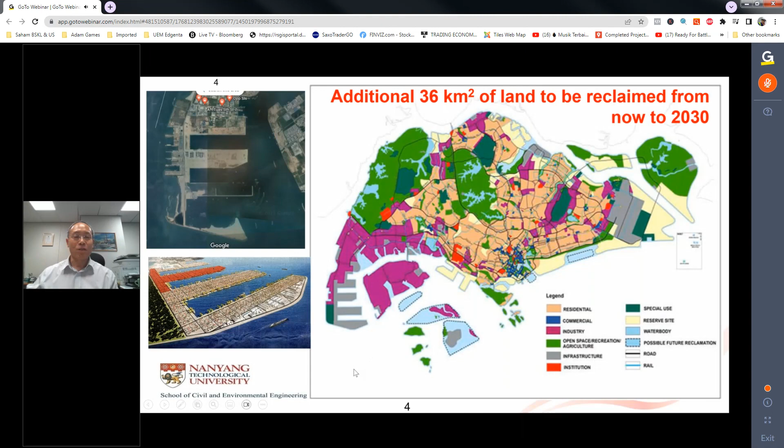By doing land reclamation first, well you also know we don't have sand or good fill materials for land reclamation. So sometimes we may have to use very soft marine clay and dredge it from the seabed as the fill materials for land reclamation.

Malaysia, Singapore, as well as many countries in Southeast Asia are also suffering from sea level rise. By prediction, maybe half, or I should say one-third, of Singapore will be inundated by 2100.

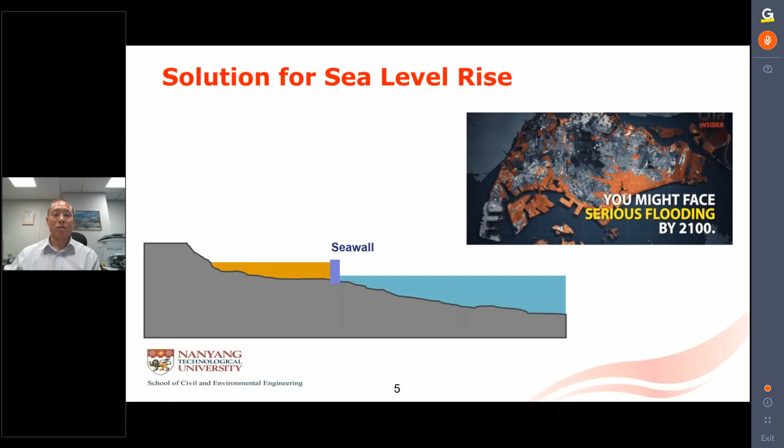This is what has been proposed for Jakarta. Some of you may have heard the proposal to construct a giant seawall as shown in the picture below. Here, it's not just having a wall, there's also some land reclamation involved. The wall can help form a coastal reservoir, as you can see in the graph, and the coastal reservoir will also provide clean water to Jakarta city.

This was a proposal quite some time ago, but it has not been implemented or gone into practice. If we are going to use the seawall to form a coastal reservoir, we will also have to dredge the 13 rivers within Jakarta, just to make sure the water collected will be clean enough.

So we will need to do dredging of the seabed. As a result of the dredging, the dredged material can be used for land reclamation, for the plan which we have just seen. In other words, for the Jakarta project, if Jakarta is going to go ahead with the project, then there will be some land reclamation to be carried out.

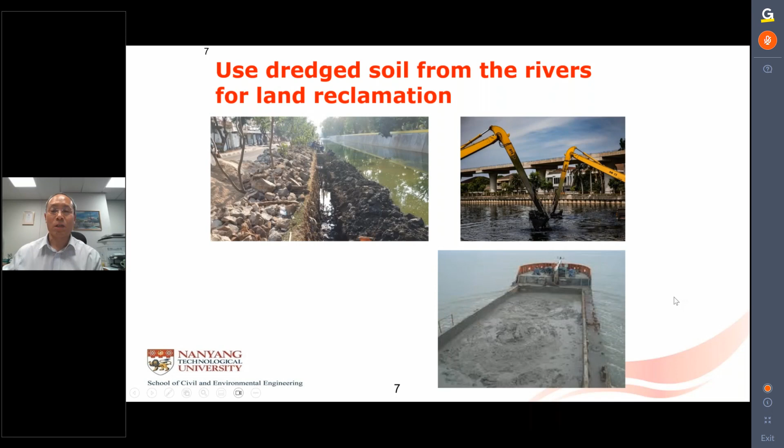So land reclamation using very soft fill materials would be one of the options for them to consider. But the first question some of you may ask is, is it feasible to use dredged slurry for land reclamation? And the answer is yes. There are a number of examples.

For example, the port of Brisbane, part of the land reclamation is by using river mud dredged for maintenance dredging from the seabed. So those dredged mud are used for land reclamation for the Brisbane port.

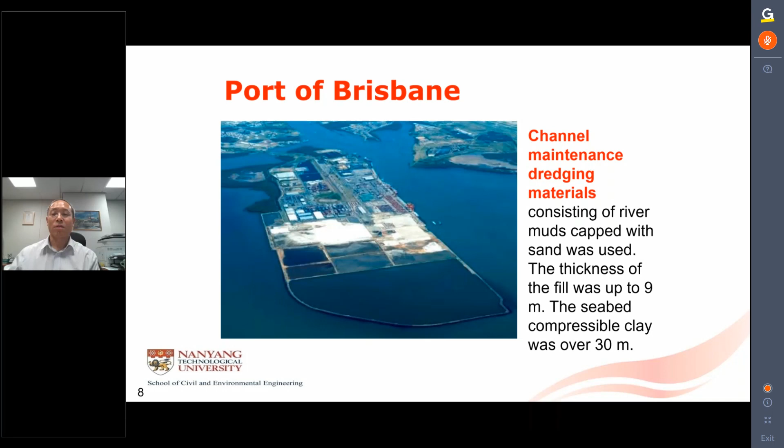Also in Tianjin or Wenzhou, which are two coastal cities along the east coast of China. Of course, Tianjin is further north, close to Beijing, and Wenzhou is somewhere near Zhejiang province. Both cities have been using marine clay dredged from the seabed in a slurry form for land reclamation.

The reason for that is because for both cities, within the vicinity of 100 kilometers, there isn't any sand fields for them to use for land reclamation. In fact, in Tianjin, they have already reclaimed more than 190 square kilometers of land purely using dredged slurry, and this is actually more than the land reclamation made altogether in the past years for Singapore.

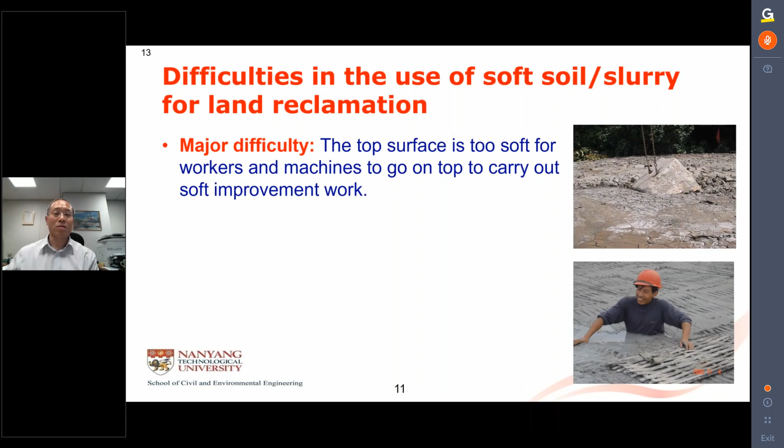The difficulty in the use of soft soil, particularly slurry, for land reclamation is that the top is too soft for workers or machines to go on top to carry out soil improvement work. Even if, for example, you want to install PVDs, you must have a working platform for the PVD installation rigs and for all your machineries to go on top. It is not possible even for a concrete block to stand on top, or for workers to stand on top of very soft, soupy mud.

So the key technical challenge is how to form a work platform. In my opinion, there are a number of methods, but the method to be used is the one with the lowest unit cost. And the reason is very simple: for land reclamation, we are talking about millions of cubic meters of fill, so if you can save one dollar per cubic meter, you are saving millions of dollars.

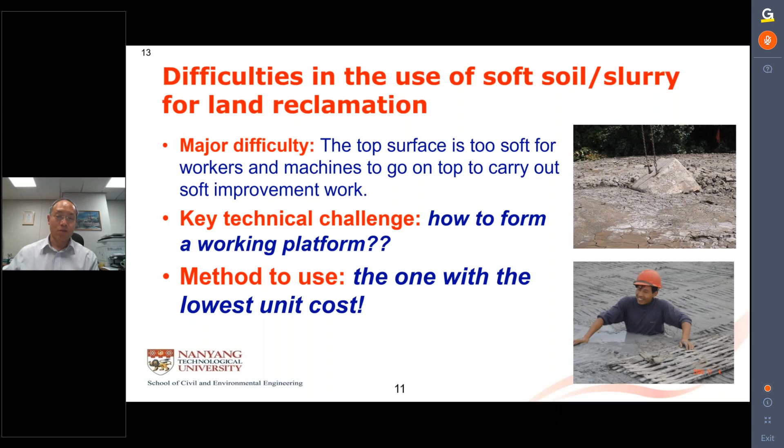Now let's discuss what are the methods available for the formation of a working platform on ultra soft ground.

But to put a layer of sand on top of very soft clay is also challenging. Before I talk about that, let me give you a quick review of other methods available. The second method is using cement.

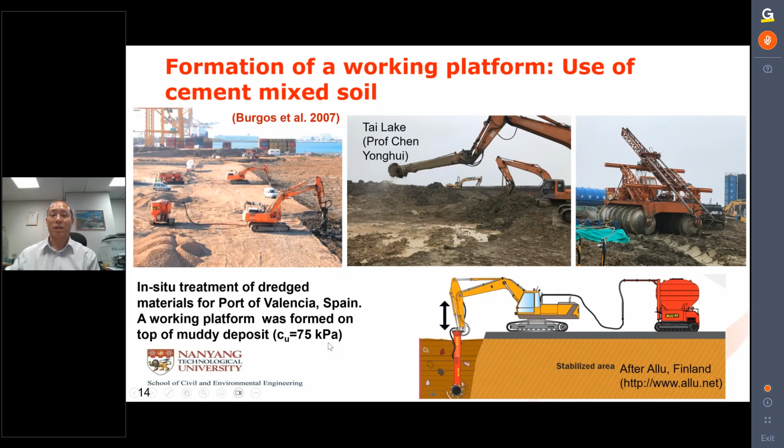Now let's go back to how to place a layer of sand on mud on very soft ground. Some of you know Professor Broms, who was my former boss. He taught at NTU for quite a number of years before his retirement. He proposed a method as early as 1987.

What he said is, if we have very soft ground — at that time he was thinking more for construction on top of some of the mine tailings in Malaysia, because you have some mining, so now you have some ponds formed as a result — if we are going to, for example, build a road on top of it, what Professor Broms proposed...

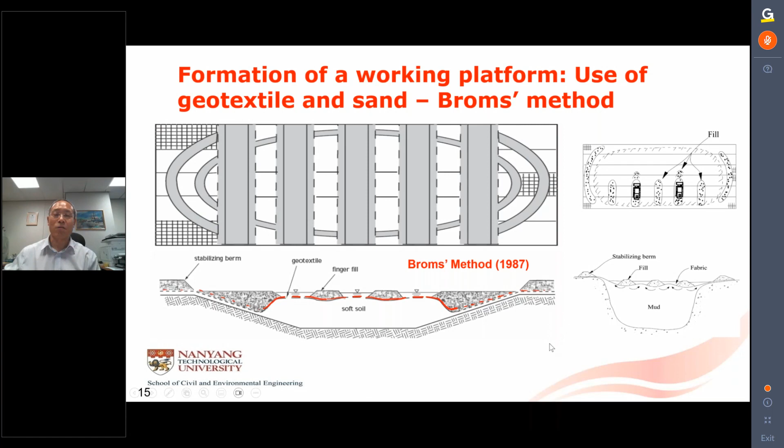Eventually you will be able to use the geofabric to sustain the finger fills. Then after that, you can spread the fingers out and form a layer of fill, a layer of sand fill, on top of the geofabric.

Professor Broms has also done analytical work to develop solutions for calculating the tensile stress in the fabric, as well as the amount of settlement involved for the berm to be stable. He also developed design charts for the bearing capacities of each fabric, calculated as a function of the width of the finger. The graph on the left is for 2 meters, and the graph on the right is for a width of 4 meters. His variables include the distance between the fingers, L2, which ranges from 4 meters to 10 meters in his chart.

He has also given solutions for fabric with different tensile strengths, for example whether it's 160 kilonewton per meter or 40 kilonewton per meter, and the amount of settlement as well as the bearing capacity involved are different. So this is within our expectation.

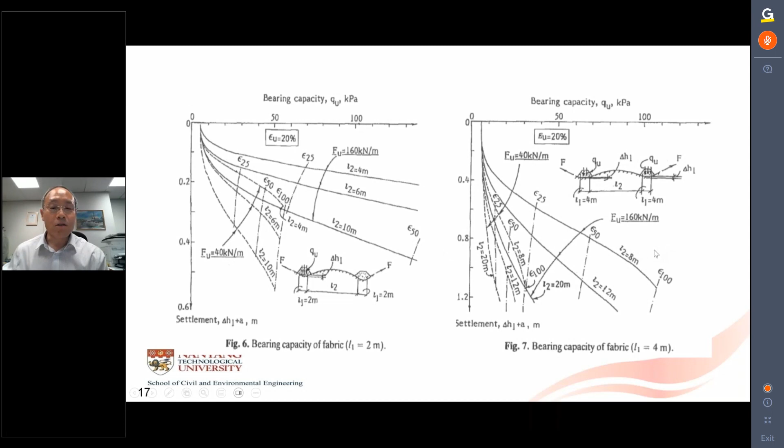We actually wanted to use Professor Broms' method for one of the projects in Singapore, which involved pumping marine clay into a pond. However, we encountered difficulties because even if you put a layer of fabric, the ground is still so soft that it is very difficult for a finger to be formed.

Even though the finger can be relatively narrow and the height of the finger can be small, sometimes it's just like a waterbed - the sand will not form a strip. Sometimes it lumps into a chunk and sinks down, defeating the purpose of having a finger.

So to overcome this difficulty, we thought it's probably easier to form a finger using a geotextile tube. If we put a geotextile tube, we can just pump the sand into the tube, and in this way the fingers or berms can be formed. So we did that, and it was better than just putting sand on top of the fabric to form a berm.

Because now it is cylindrical, or you can see it's an oval type of finger, rather than a berm as proposed by Professor Broms, the analytical solution may also need to be different.

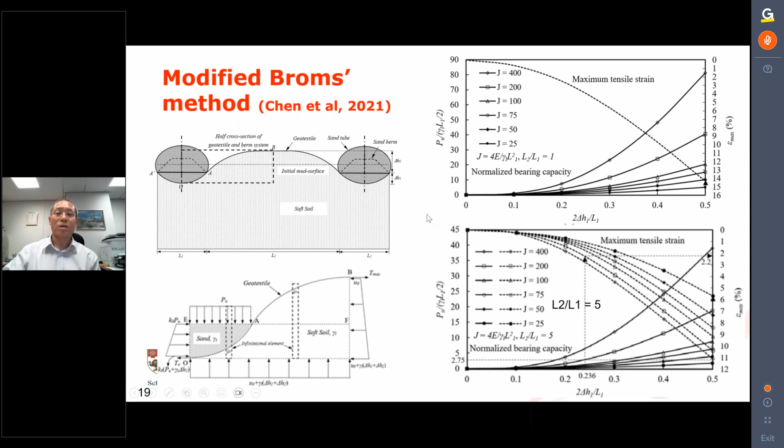So the so-called modified Broms method was attempted for one real project. The picture showing here shows some of the construction processes.

Firstly is the placement of a layer of geotextile fabric. As you can see from here, the geotextile was used. Because the geotextile was actually relatively heavy, it was not that easy to pull from one side of the pond to the other. Foam was also used to enable the geotextile fabric to float on top of the water. A crane is used to pull it from the other side.

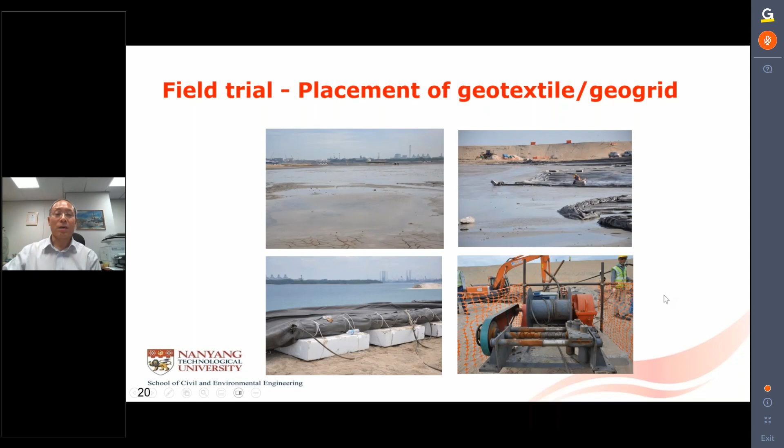Even so, it is not that straightforward, because sometimes the joints of the geotextile fabric can tear. If that's the case, you have to improve the seams to make sure the seams will not open. Then even after the geotextile was placed, and after the so-called geotube was used to form the berms and fingers, subsequently for this particular project we actually observed a burst.

A burst of the geotextile fabric - in other words, the mud is now shooting out from the opening. The mud actually covers quite a large area of the constructed site. Once you have this, it is considered a failure in terms of the construction process.

So in other words, even if we have used a geotube, sometimes if your mud is very soft, if it has a very high water content, it is difficult to apply this method.

Well, this is for one project. Then for another project in Singapore—excuse me, I cannot mention the project names because I've signed a lot of confidentiality agreements, but nevertheless I can show some pictures. So we thought, having learned our lessons, that one layer of geo fabric, geo textile, may not be strong enough.

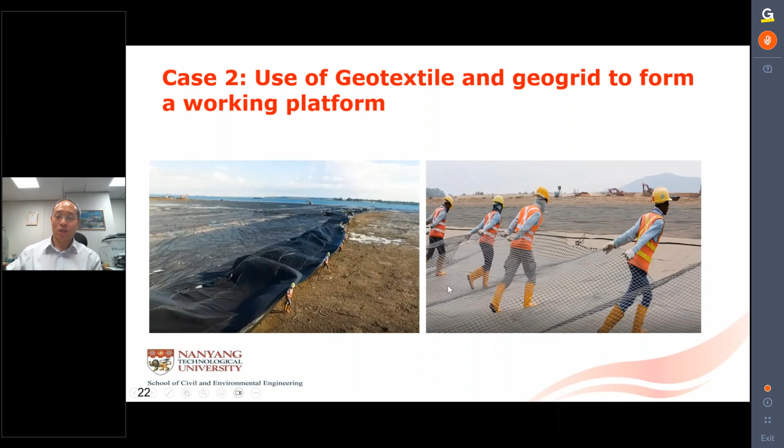So this time we put the geogrid below and geotextile on top. We thought that with this, the strength of the geogrid plus the geotextile would be strong enough against any bursting or rupture. But as a matter of fact, in this particular project, a bursting took place again.

So the mud actually shot out and covered quite a large area of the geogrid plus geotextile. But it didn't just cover it—some of the mud sank down, and this caused a lot of inconvenience and a lot of time for the remedy work for cleaning up.

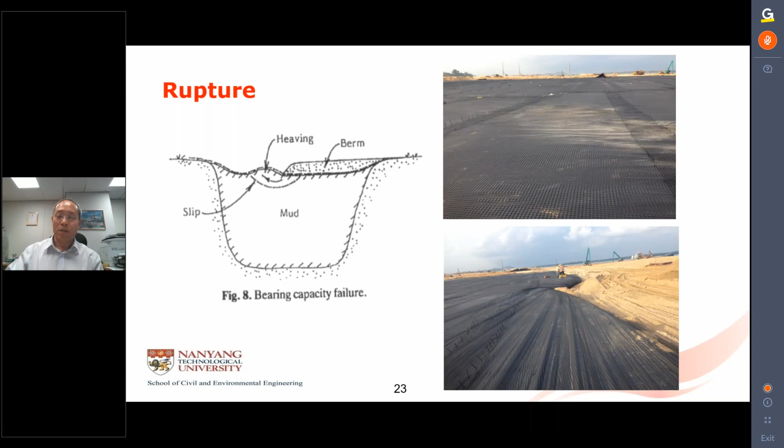Well, the next solution, of course, is by using bamboo. You may say, well, even if your geogrid is not rigid enough, the bamboo will offer not just elasticity but also rigidity, giving you a better chance for the sand layer to be placed on top.

Indeed, in China this bamboo mattress has been adopted. In fact, for one of the projects in Malaysia, as shared by Mr. Toh, I took this from his paper and his co-workers' paper published in 1994 in Geotextiles and Geomembranes. Those are figures taken from his paper, and he was using Polyfelt TS700 at that time.

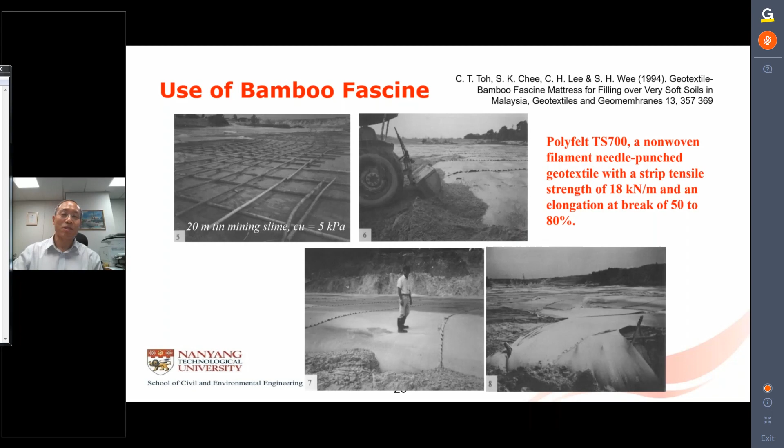Even with this bamboo fascine, as reported in this paper, bursting took place again. So in other words, even with bamboo fascine, there's no guarantee that bursting will not take place.

Well, to conclude, you can use the Broms method, a modified Broms method, or a bamboo mattress for the formation of a working platform by putting a layer of sand, a layer of good earth, on top of slurry, with the help of either geotextile or geogrid plus geotextile. However, there is no guarantee that bursting failure will not take place.

So basically, it may not take place, so you need to run the risk. But is there another way to enhance our reliability slightly better? For that reason, we proposed one method, the so-called short PVD method.

So basically, what we say is, since we need to form a working platform, can we use PVDs which are installed only a few meters into the mud? We improve the top layer first.

The whole purpose of improving the top few meters of mud is for the soil to gain a bit of undrained shear strength. If you do finite element analysis, you will see it makes a big difference whether your undrained shear strength is 1 or 2, versus 5 to 10. If it's 5 to 10, your stability is much enhanced compared to soil without any undrained shear strength, or with only 1 or 2 kPa.

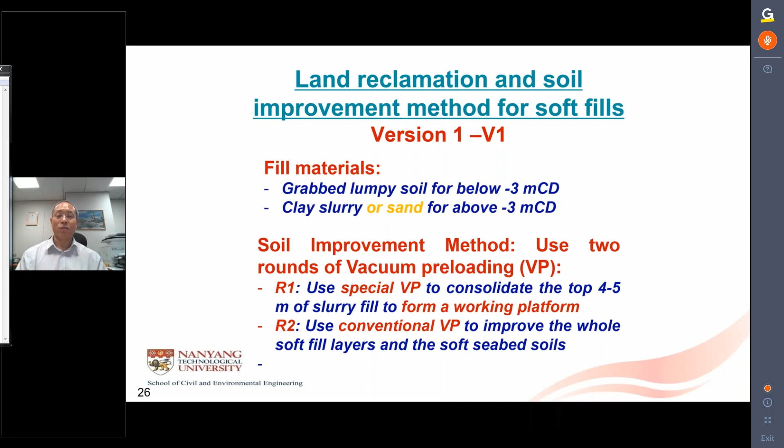So once you have a working platform, you can do normal soil improvement work. You can let your vertical drain installation rig and lightweight trucks go on top to do further soil improvement. The construction procedure following this proposed method can be illustrated in the following cartoon.

So if we can still use lumpy soil, and if it's not a super large scale project, we can still grab soil and use a barge to transport the lumpy soil into the land reclamation site. Then we dump it using a bottom-open barge. However, this can only be done to a certain water depth, let's say to maybe -3 MCD, if 0 MCD is the mean sea level. After this, it will be difficult for you to dump lumpy soil anymore.

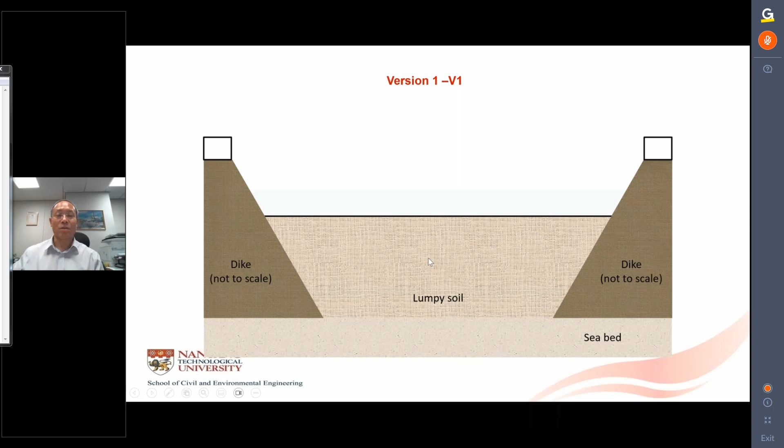So you have two choices. One, you can top it up using sand, or if you don't have sand, you can still top it up using dredged clay. But this time you have to use hydraulic fill—you have to use pumped slurry.

Because pumped slurry has a lot of compressibility and settlement, you may need to extend your dike temporarily to add more fill materials. After consolidation, you go back to the required elevation. But if you do this, it becomes difficult to go on top and do any soil improvement.

Yet you can still use a special machine, which I'll show you after this slide, to install just a few meters of PVD manually. Afterwards, you can use a very light machine for the installation of a few meters of PVD into the mud.

Then you can go on top and put a layer of membrane. Once you have the membrane, you use a vacuum pump to start consolidating these 4 to 5 meters of mud, reducing the water content to gain a bit of undrained shear strength. After that, you put a layer of sand fill.

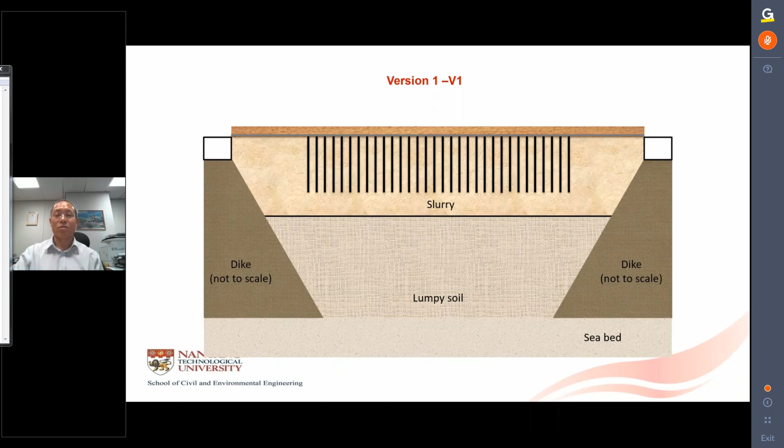In fact, 1 meter of sand fill is sufficient on top, not just to give trafficability but also to enhance bearing capacity. Then your vertical drain installation rig can go on top to install PVDs all the way through the clay fill materials and down to the bottom of the soft seabed. After that, you continue to use vacuum to do further soil improvement. The vacuum has a limitation of 80 kPa as its maximum surcharge.

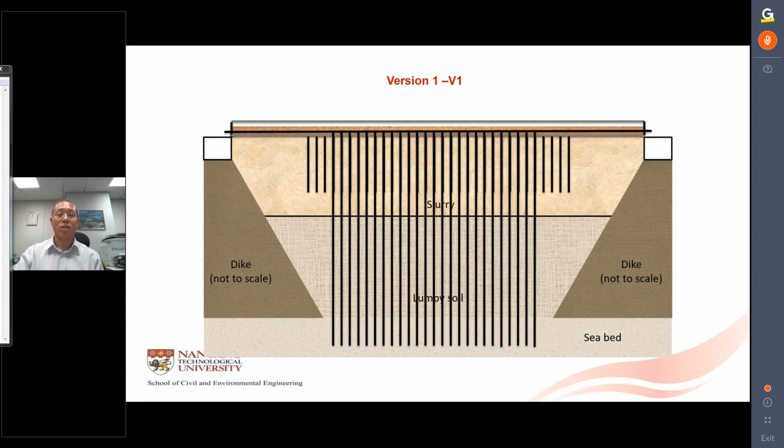However, if you need a higher surcharge, what you do is, after vacuum consolidation, or maybe in the middle of it, once your clay has gained enough undrained shear strength, you go on top and add a fill surcharge to top up your surcharge if you need more than 80 kPa.

Once the PVD has been installed, you don't need to put a sand blanket. For those familiar with vacuum preloading, the first step is installing your PVD. The second step is installing the horizontal drainage pipe, which normally needs to be embedded in a layer of sand, called the sand blanket. But there are ways to do away with the sand blanket, by connecting your PVDs directly to the horizontal drainage pipe.

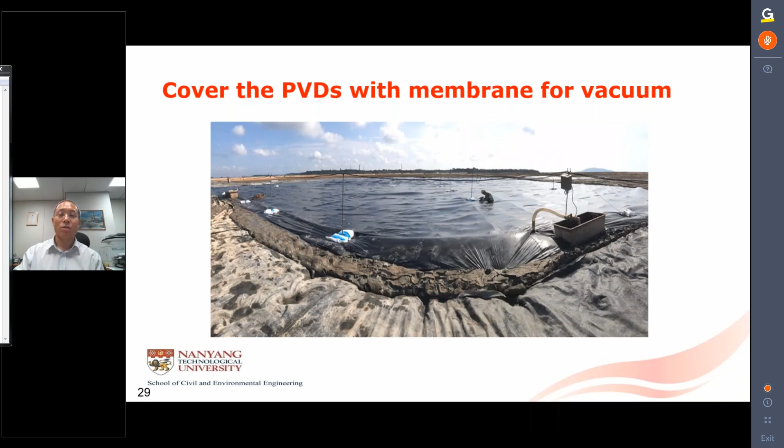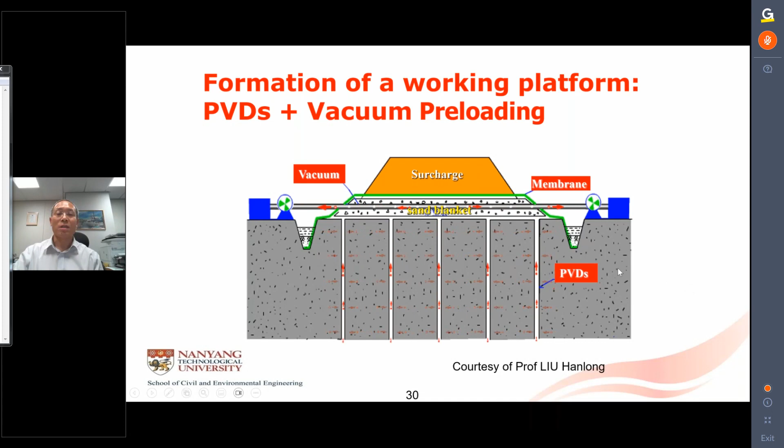I'll show you the pictures after this. Once your PVDs are connected to the vacuum pump, you can switch it on and start vacuum consolidation, as shown in this cartoon.

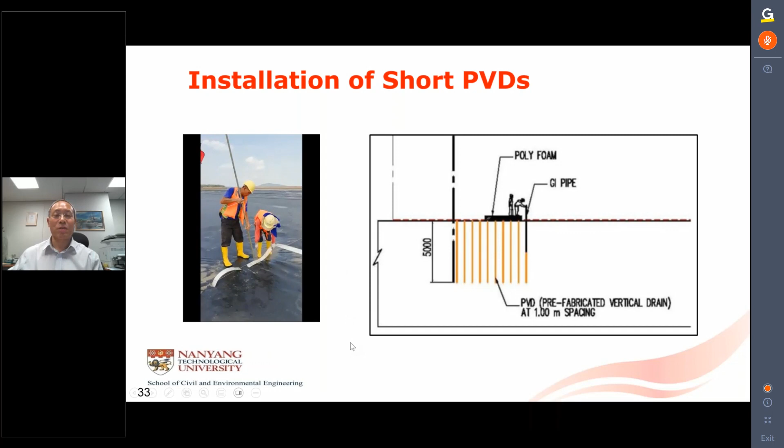Yeah, so this is how the PVD is installed by manual labor. Of course, you can say, wow, this is very labor intensive. Don't worry, I have another example to show you on how the PVDs can be installed using a very light machine. Once the PVD is installed, it will be connected to the vacuum distributing pipe, as shown in this picture, by a special coupling.

So this coupling is actually easy to connect. For the second case study, I'm going to show you some more pictures on how this is done. Once your PVD is connected to the drainage pipe or vacuum distributing pipe, as shown in this picture, you can put a layer of membrane.

Sometimes you may need a layer of membrane and another layer of protection, or even more than two layers. But once you have put the membranes, you can start to use your pump to do vacuum preloading. For this particular project, at one monitoring point, a settlement of up to 800 millimeters was incurred within 55 days.

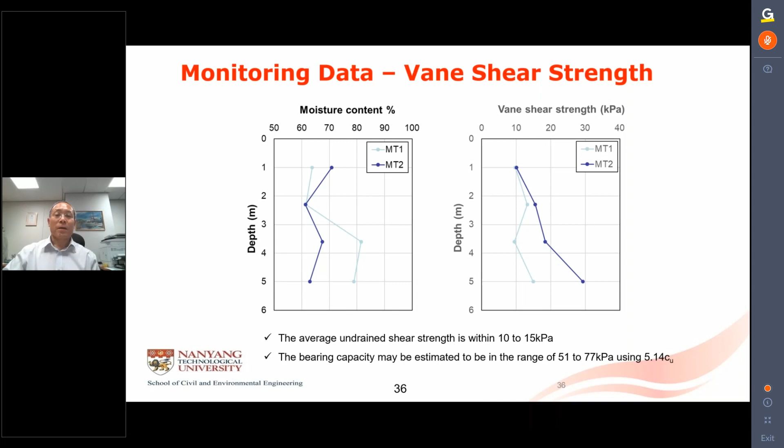That was one case in Singapore, and recently I was involved in another land reclamation work in Indonesia, where the same method was adopted.

The ground is still relatively soft. In this case, a layer of bamboo mattress was placed before a layer of geofabric was put on top, so the workers can work on top of the bamboo frame.

To do installation of PVD, as well as connecting your PVD to the horizontal pipes, you can do some light construction work. But at the time we visited the site, we still had to use timbers for people to work on top, because even with a bamboo mattress, the ground is still very soft.

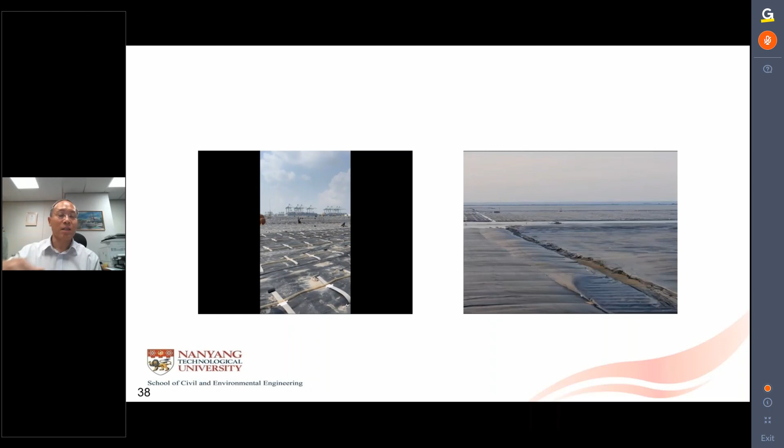The PVDs were installed using the lightweight PVD installation rig, as you can see from the earlier picture shown over here. So this is how the PVDs are connected. And here is the picture

showing when the membrane has been placed, when the vacuum has already been applied for some of the sections. You can see from the picture, this is a big project, not a small area for land reclamation.

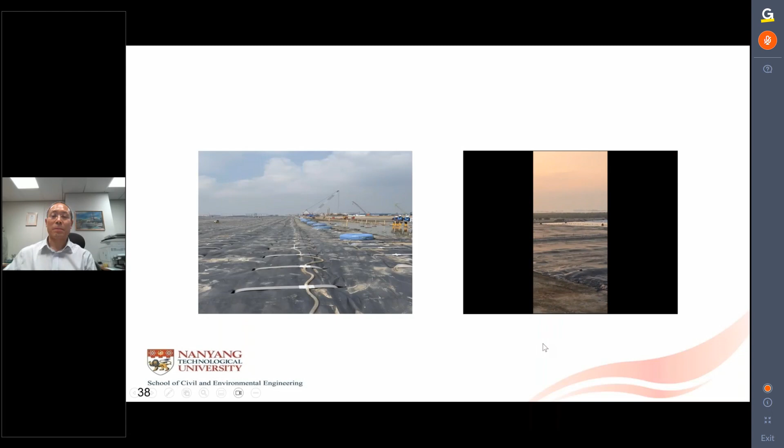So in other words, I'm using the short PVD followed by normal soil improvement. At least this method is feasible. It has been used for 2 projects, one in Singapore, another one in Indonesia.

But even so, in my opinion, this method has its own shortcomings, because there are still a number of difficulties involved, for the simple reason that PVD is used. So what are the difficulties? Number one, we still need a working platform, which is difficult and time-consuming to build. Although we can use short PVD, the consolidation on the short PVD will still take at least 2 to 3 months.

So this is time-consuming, and also it is not that straightforward for you to install the short PVDs and for you to do vacuum consolidation. And the second problem is the soil improvement can only be carried out after all the fill materials has been placed, and that may take a long time.

If the fill materials has not been placed, this will add on to the construction duration, in addition to the 2 rounds of vacuum consolidation.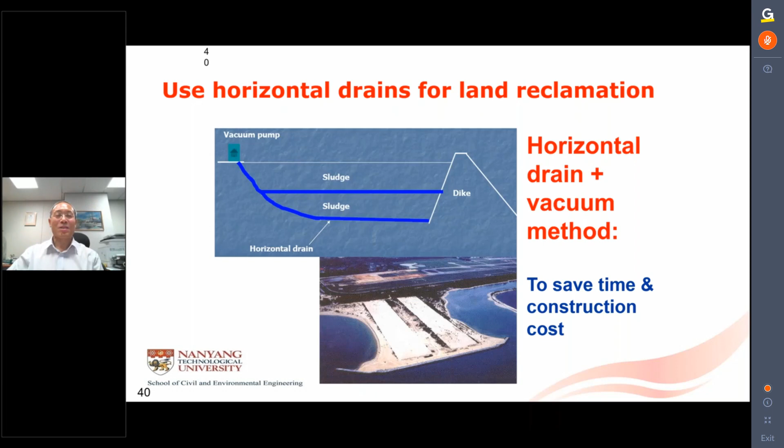But at that time, if you are going to use sand layers, it is very challenging to do quality control, because it's very difficult to place, let's say, 0.5 meter to 1 meter of sand layers on the water into soft clay. So for that reason, we have proposed something else.

But before I present something else, I also have to say horizontal drains has been attempted for this purpose. In the past, people have been using vertical drains, placing them in a horizontal way to act as horizontal drains. But this method may not be working all the time for a number of reasons.

Reason number one is if each PVD is placed individually, in other words the PVDs are not connected, the PVD can be everywhere. So it's very difficult for you to ensure the PVD will form a grid which is used for you to do design.

In other words, you have to do design by assuming a certain spacing for the horizontal drain, a certain vertical spacing, this and that. And that spacing may not be maintained once the construction is carried out. So in other words, it will be difficult for you to do design.

The second issue is that if you just put individual drains, the drainage is actually rather limited. We didn't realize this until we did further research and developed our method.

So what is our method? Our method is to put drains, which can still be PVD or other specially designed drains, and place them on top of a layer of geotextile sheet, as shown here. In other words, it comes as a piece of blanket with drainage enhanced where the drains are installed. For that reason, our product is called the horizontal drainage enhanced geotextile sheet, not just the horizontal drain.

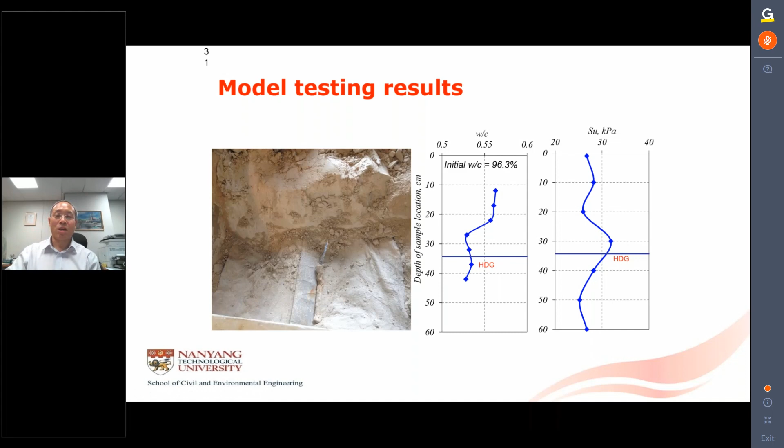You can see from the water content, our initial water content is somewhere around 96%. Within 3 days, the water content is reduced to somewhere around 55%. The undrained shear strength has increased from 0 to somewhere around 25 to 30 kPa. So at least as demonstrated from this model test, this method can be effective.

Subsequently, Dr. Chen, who was doing a PhD at that time, carried out many more model tests. Some used a bigger tank, and some used a tank which is very tall to study the vertical influences — in other words, to study the consolidation on different layers of horizontal drainage blanket, not just one layer.

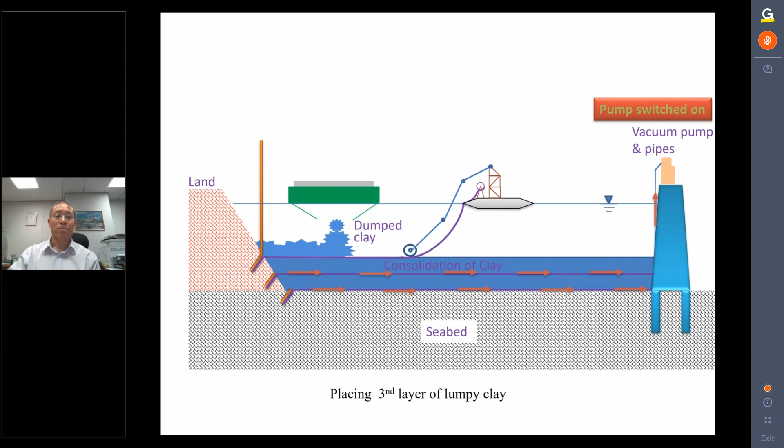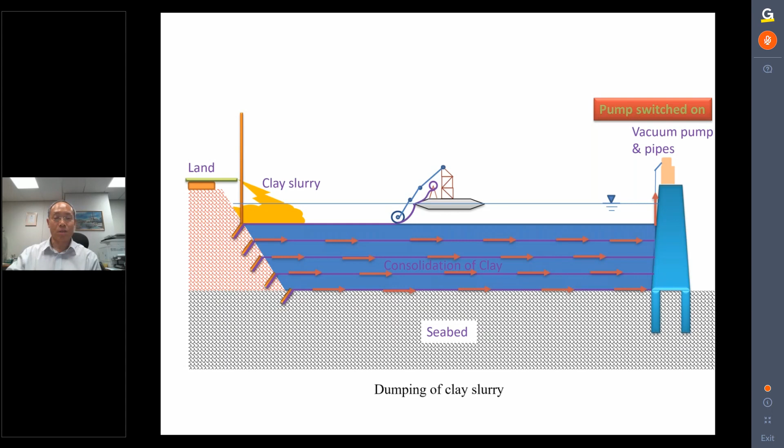So in other words, your consolidation can be much faster. Then you repeat the same process. Then, of course, for the top few layers, you cannot use your bottom open barge anymore. If you are using lumpy soil, then you have to use maybe clay slurry to finish up for the top layer.

But nevertheless, the biggest advantage of using this particular technique is that while you're placing the fill, the bottom layer of the soil is being consolidated, not just under 80 kPa, but under much higher consolidation stress. So by the time you have placed your fill to the top, basically your bottom soil has been more or less improved. I think this will save a lot of time.

But nowadays, time is also money, right? You have to borrow money from the bank. You have to pay interest.

So this is a construction sequence. Now let's go back to a summary of this particular method. Vacuum pressure can be applied layer by layer, and while the fill materials are placed, the fill on top of the horizontal drains becomes surcharge, as I have already mentioned.

In this particular method, no sand blanket is required, simply because you don't even need to place your horizontal pipes, and you save time because the soil is consolidated while the land reclamation is ongoing. But more importantly, it is more reliable for you to predict the settlement.

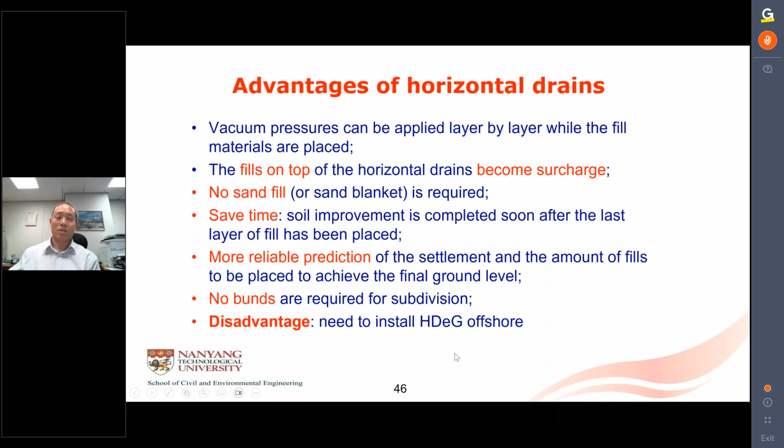However, it does have its disadvantage: you have to install the horizontal drainage enhanced sheet offshore, layer by layer. This can be challenging, as I was told. With this, I have finished my first part.

This first part was on construction on ultra-soft soil, particularly with land reclamation using clay slurry as a reference. Now I'm going to change the topic and discuss construction of seawalls on soft seabed. At the very beginning, I mentioned we also have to have measures to deal with rising sea level. Land reclamation can be one of the methods. Sometimes we may just need to build seawalls, but building seawalls on soft seabed marine clay can also be challenging.

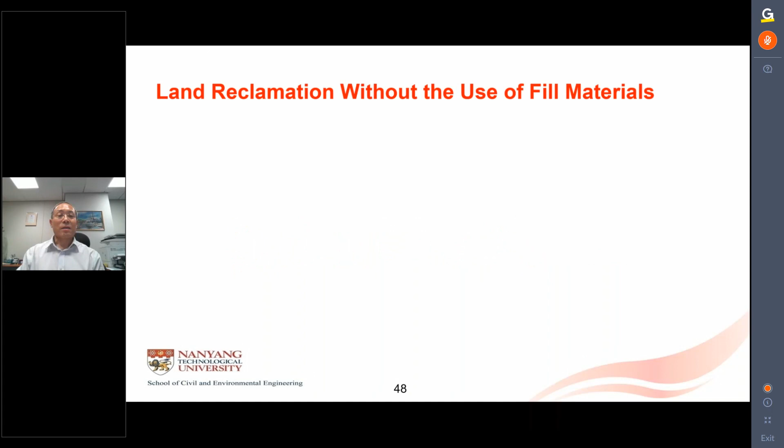Also, in Singapore, we actually do not have much fill material. Even with the mud, we don't think we have sufficient mud for us to do land reclamation. So maybe we have to be a little bit more innovative to see whether we can do land reclamation without the use of fill materials.

So one of the proposals is, once you have built your seawall, can we do construction from the seabed upwards, rather than filling with sand or with clay? If you have a very strong seawall, I think we will be able to do that. So this is one of the proposals.

So if we are going to do that, then we have to have a seawall in relatively deep water. Then the question is, how are you going to construct this seawall in soft marine clay, in relatively deep water? By the way, if you have a strong seawall, in addition to the space created behind, you can actually have a floating platform in front to extend the space. So these are some of the ideas for how the seawall can be used to build the city from the seabed onwards, as well as with a floating platform on top.

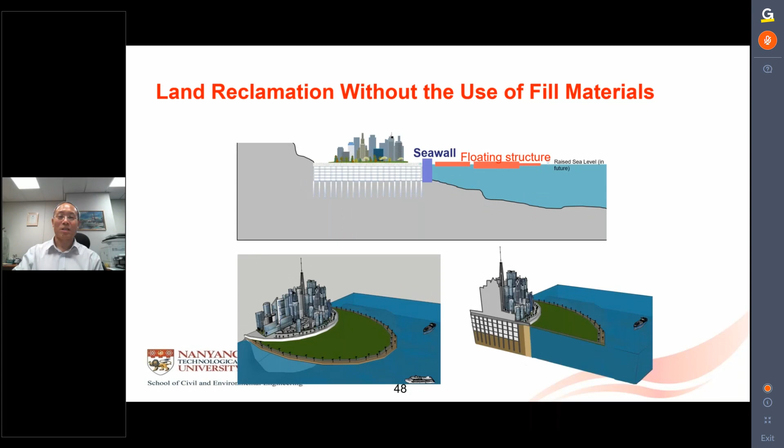Now, my question is how we can build a seawall in relatively deep water for the purpose I have just explained.

So sometimes we have to use a sandkey. We have to dredge out the soft marine clay and replace it with either sand, gravels, or stones, and then form a rubble mound before we can place a 20-meter tall concrete box on top to form a seawall. In this way, you have to do dredging and improve your foundation before you can place your seawall.

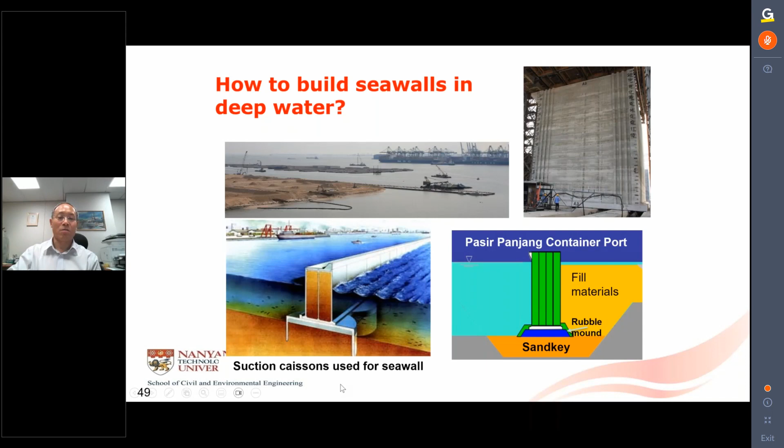An alternative method is to use the so-called suction caisson. The concept is not new because it has been used for offshore platforms. The principle is, you can imagine a cylinder. If you put this cylinder on top of the seabed marine clay and apply suction, the suction will suck this cylinder into the mud. So you have a cylinder sinking into the mud to form a foundation, and then you can have a seawall constructed on top. This concept is illustrated by this particular picture. Some of you are familiar with this.

So for this reason, I'm not going to explain in detail the principle of the suction caisson. I'm only going to discuss how we can use a suction caisson to form a seawall in relatively deep water. One design is to use the suction caissons to form the foundation, forming cylindrical caisson foundations in soft marine clay, and then with another layer of caissons to form a seawall, as shown in this picture.

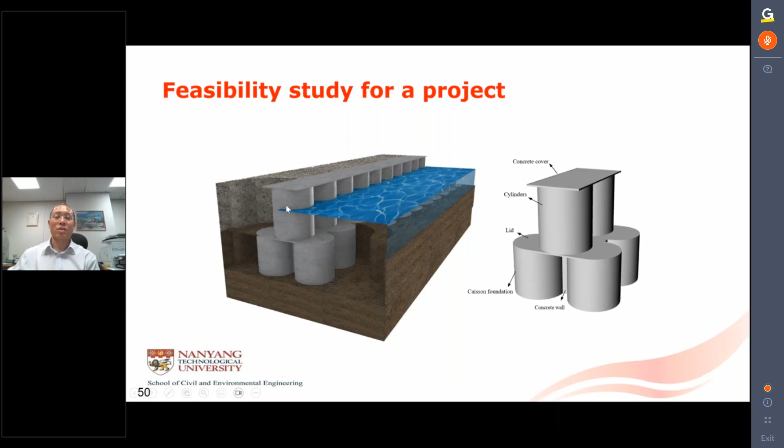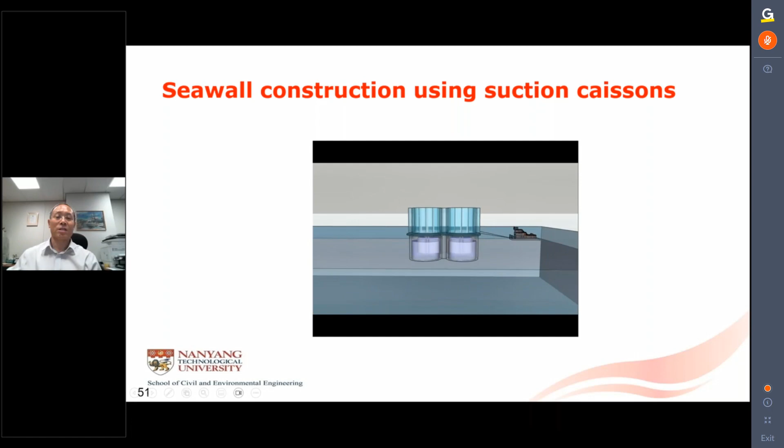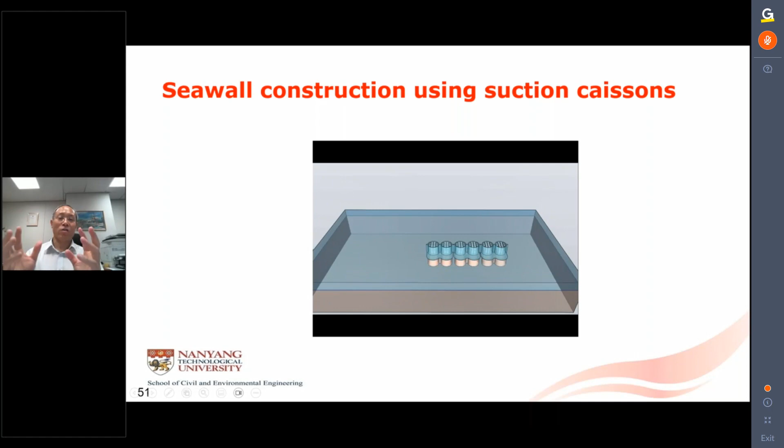And then you apply a suction. The reason why we are using 4 cylinders is actually to overcome the eccentricity. So if, for example, one cylinder sinks more than the others, you can adjust the vacuum to make sure the 4 cylinders will sink evenly into the ground. That's the reason for having 4 cylinders.

But subsequently, someone told me you can try using 3 cylinders. You probably can achieve the same purpose. Once you have the cylinders, behind them you can place fill to form your land reclamation. But if you just want to form a seawall, the cylinder will act as your seawall. Of course, there are other technical details on how you join the two different sections together to form a watertight wall, but I don't have time to discuss this. Those details have also been studied in the past.

This is the construction, and some of you may be asking, how do you design for such a seawall, such a foundation? To address this, my PhD student Chen Hao has developed some analytical methods for you to check, just on the back of an envelope, to do a quick calculation on the factor of safety for such a seawall.

You can use either deep cement mixing columns, or you can use sand compaction piles. In our particular parametric study, we use sand compaction piles because they are probably the weakest among all the options available, among deep cement mixing and other methods.

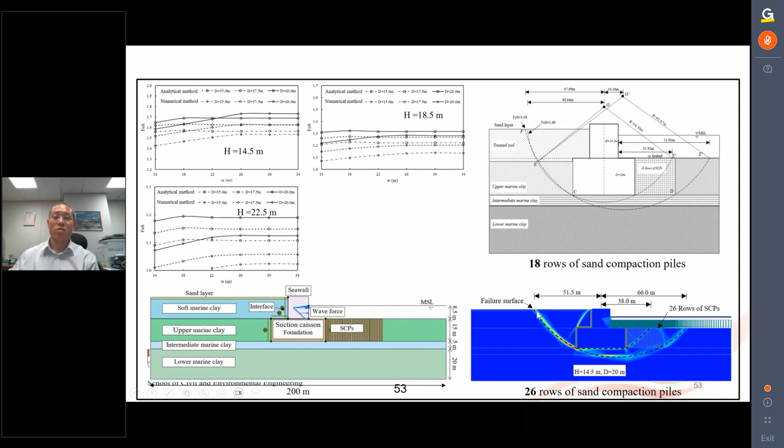The paper is just published in Ocean Engineering, so I don't think I have time to go through the details. If any of you is interested, I can send you the paper. What is more interesting in this paper is we even assume the land reclamation behind the wall uses a method which is just proposed by us, using horizontal enhanced drainage blankets or geotextile sheets. For that reason, we also have information on how these geotextile sheets are designed.

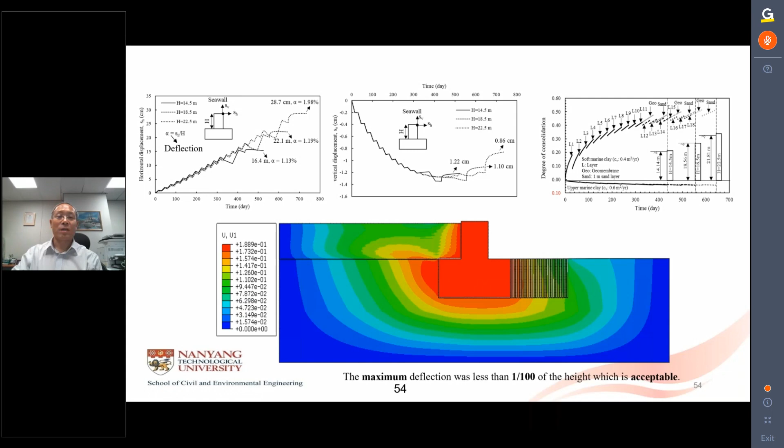All right, so with the suction caisson as the first method, now I'm going to share a case study. This case study is for the construction of a breakwater for the Shanghai port. The project was carried out in 2006 or 2007, I believe. Our paper was published in 2009 in the Institution of Civil Engineers journal, together with Professor Yan Shu Wang from Tianjin University.

So the project is like this: to create a navigation channel by building two breakwaters on two sides. The whole purpose of having this breakwater is to reduce the need to do maintenance dredging from time to time, because Shanghai port, being I don't know whether it's still the number one or number two, but it's among the top 5 busiest ports in the world, doesn't have time to do maintenance dredging because it reduces productivity. So having those two breakwaters, they believe, will stop the siltation from forming in the navigation channel, and so will reduce the need for maintenance dredging.

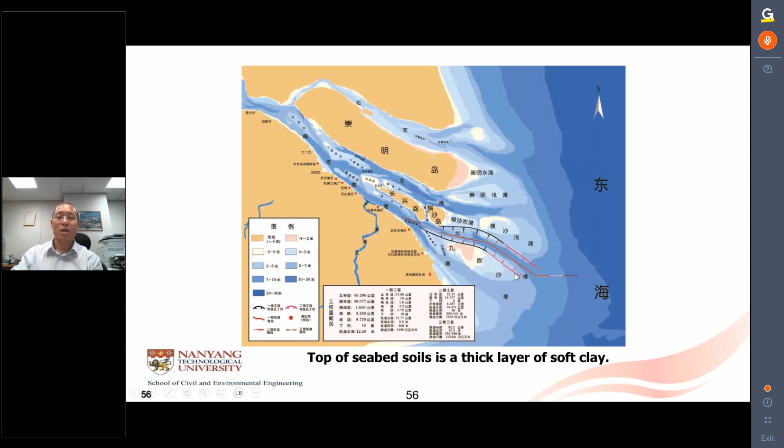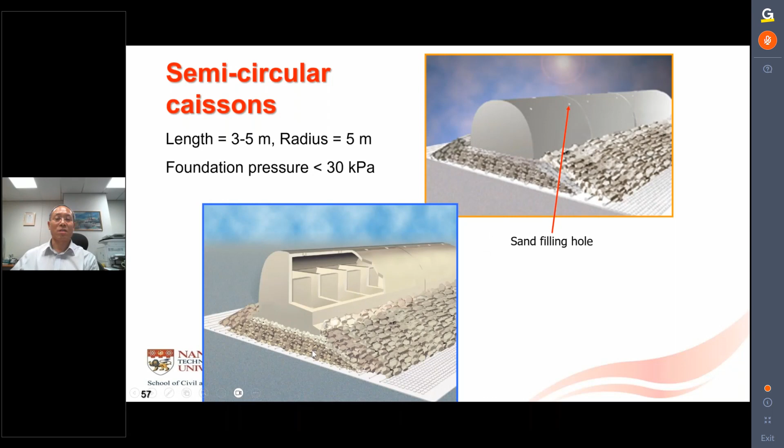The seawall was designed so the concrete structure is a semi-circular caisson, as shown here, with partitions, so this is a hollow caisson. Once installed, sand is filled through the openings on top to enhance gravity. This caisson has to be positioned on top of a rubble mound, which consists of rocks as well as scour protection layers.

Because this is in relatively shallow water, scour is still a consideration. The dike was constructed along the black section without much of a problem, but those are the very shallow sections, some actually exposed at low tide, so no problem. But once we reach a relatively deep section, shown in the second section, there was a failure.

Before I introduce the failure, let me show you the cross-section of the design. On top is a semicircular concrete caisson sitting on a layer of rubble mound. The rubble mound was made of a geotextile layer with a sand blanket and rocks placed on top. On the two sides, we have scour protection layers, and later I'm going to show how all the scour protection layers are installed.

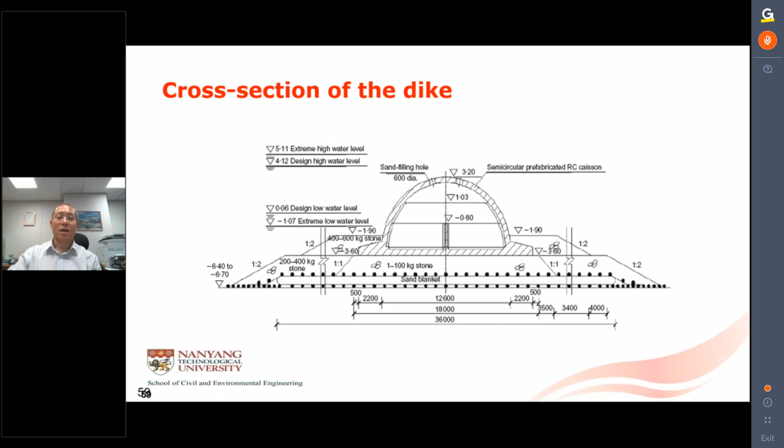During the construction in the second section, there was a failure after a heavy storm. Shanghai is still affected by typhoons and heavy storms. After one heavy storm, some of the concrete segments settled to different depths—some settled, for example, 1.5 meters.

Here is the indication of the elevation. The top number is the elevation before the storm, the number below is the elevation after the storm. If you look at the first caisson, it sank almost 1+ meters—3.1 minus 1.5. This is also the horizontal settlement, and one of the sections slid for a few meters horizontally. In other words, there wasn't enough bearing capacity for the caisson, and also not enough horizontal resistance to the storm.

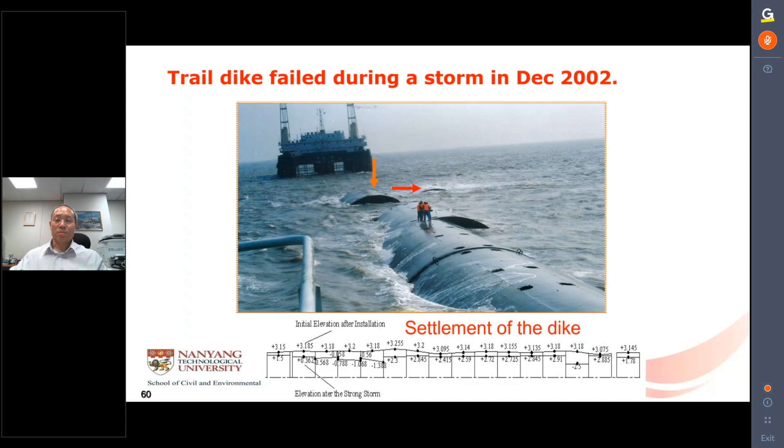This is the settlement of one particular caisson, I believe at this location, where the settlement is the largest. As shown here, with the wave height and the storm, at one stage the caisson just gave in—it just sank into the mud.

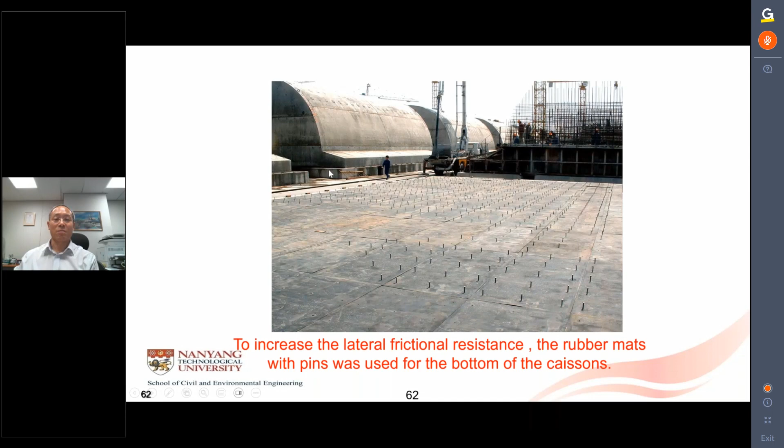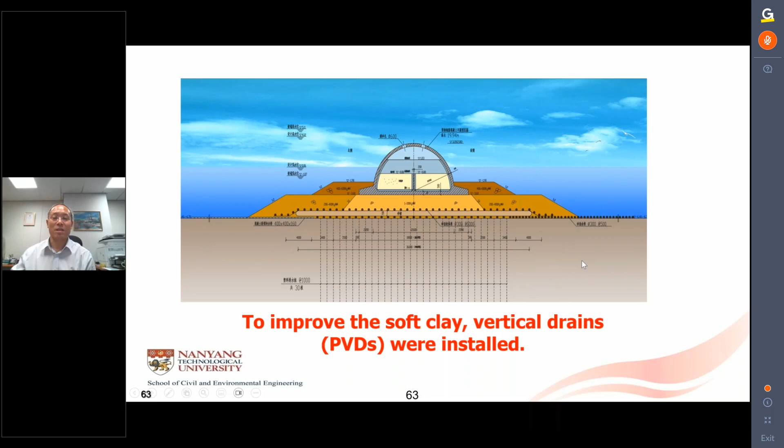To enhance the bearing capacity, PVDs were used. It was believed that once you install PVDs 10 meters into the ground, with the rubble mound and the surcharge, the seabed will have enough bearing capacity to support the concrete segment, the semicircular concrete segment.

So 12 mandrels were inserted into the ground, and even the anchor plate was recovered for this particular project. However, for this project, the PVD can only be cut at the barge level—in other words, with 10 meters of water depth, you have 10 meters of wastage of your PVD. But for the Hong Kong third runway, the PVD was cut from the seabed, which gives some savings on the PVD materials.

For the scour protection layers, there are 2 methods. One method is to use a sand-filled geotextile tube. You place a layer of geotextile sheet, but on the sheet you have ribs, and these ribs are small geotextile tubes. You pump the sand into the tubes while the blanket is placed under the sea. So this is one method.

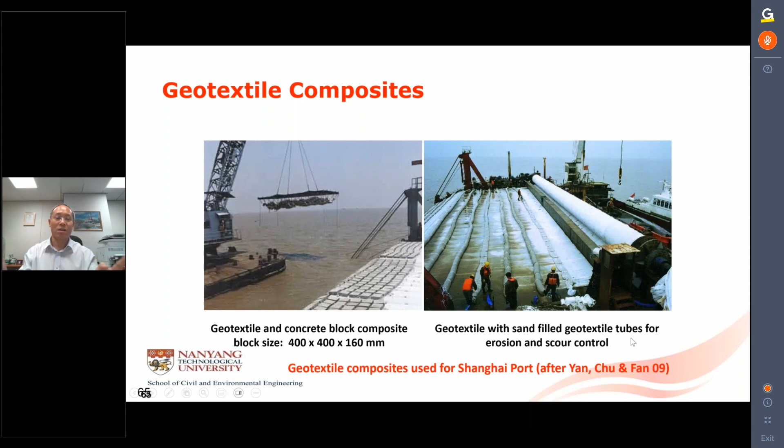The second method is by placing chained concrete blocks, composite on top of the geotextile. Both methods are used, depending on whether it's close to the caisson or further away from the caisson.

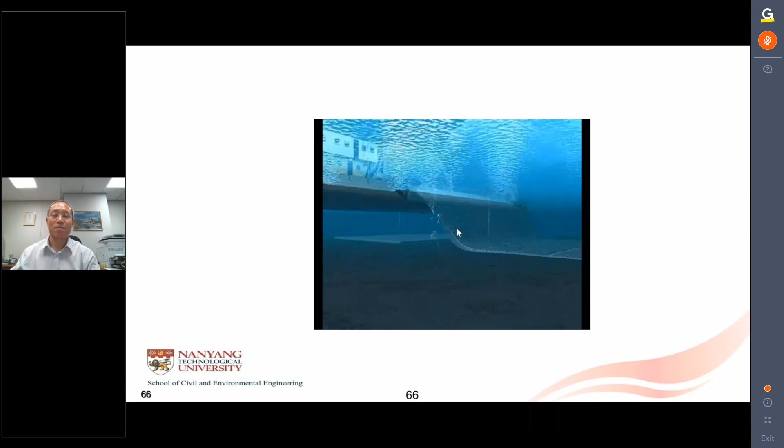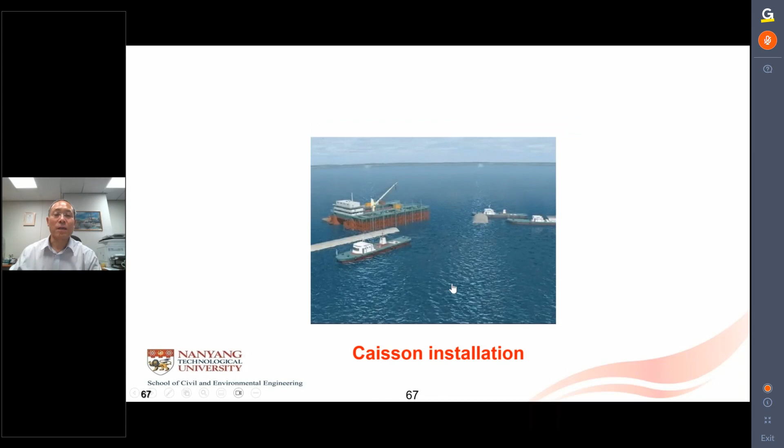Here is the animation to show how the concrete chain block was placed, as well as how the thin geotextile tubes were inflated by sand while the geotextile was placed. And this animation shows how the caissons are installed in place.

By the way, the PVD installation is only up to 10 meters. That's because after the stress distribution, the conclusion is that when the stress is transmitted into the layer deeper than 10 meters, the intensity has much reduced. In other words, you don't have to improve the clay below 10 meters.

So that actually indicates that if you install PVDs to 10 meters, don't expect the neighboring effect. Don't expect the soil 12 meters deep will benefit from the installation of the PVD.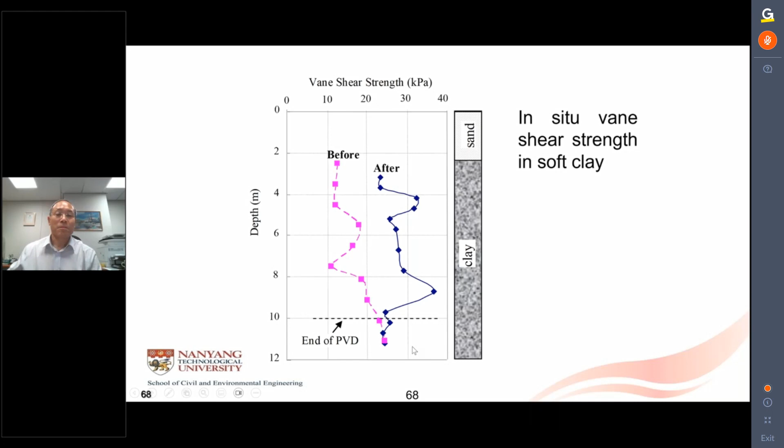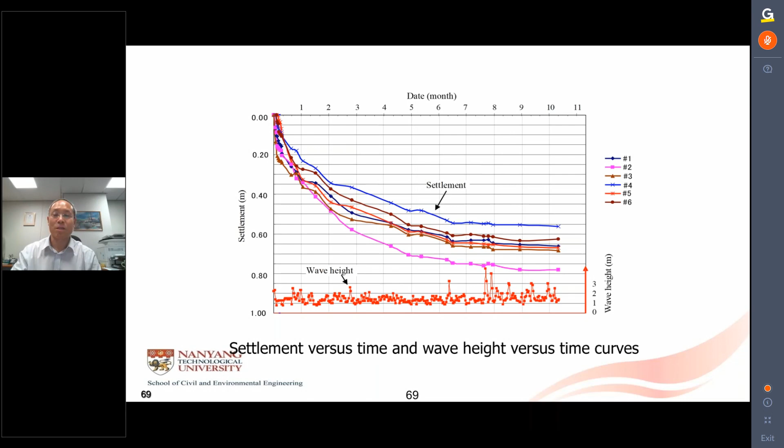So with this, it leads to the summary. We discussed several methods for the formation of a working platform for construction on super soft soil. A method of short PVD plus a vacuum preloading method has been proposed. Two real construction cases have demonstrated that this method is proven to be effective.

However, this method is time consuming, simply because you have to do fill preloading or fill surcharge preloading or vacuum surcharge preloading for 2 times, and each time may take 2 to 3 months. So it is time consuming, and also you can only do this by placing all the fills in place before you can do soil improvement.

To overcome this, another method using a horizontal drainage enhanced geotextile sheet is also proposed for land reclamation using clay slurry. So this is for the first part, for soil improvement for super soft soil.

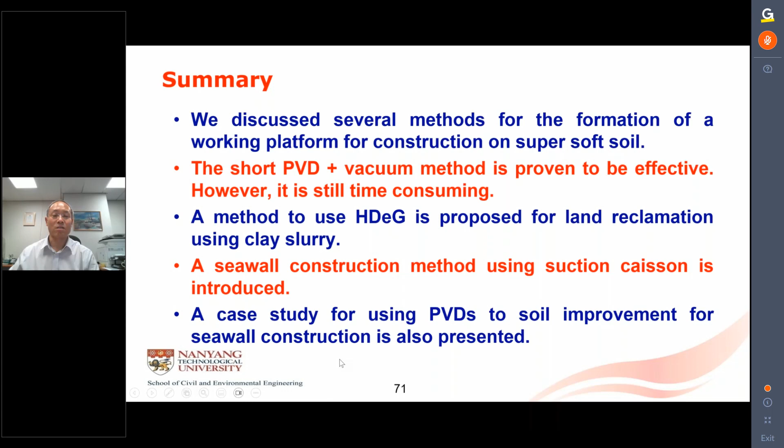Then later on, I also introduced 2 methods for the seawall construction. One is using suction caisson, another one is by using PVDs to improve the seabed soft marine clay to enhance its bearing capacity for the seawall.

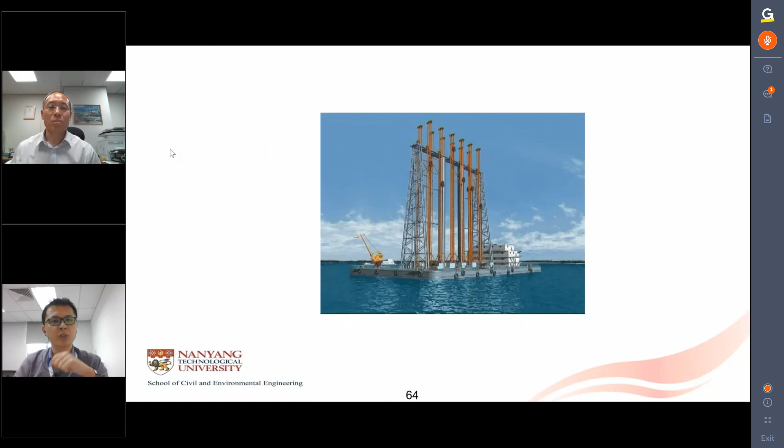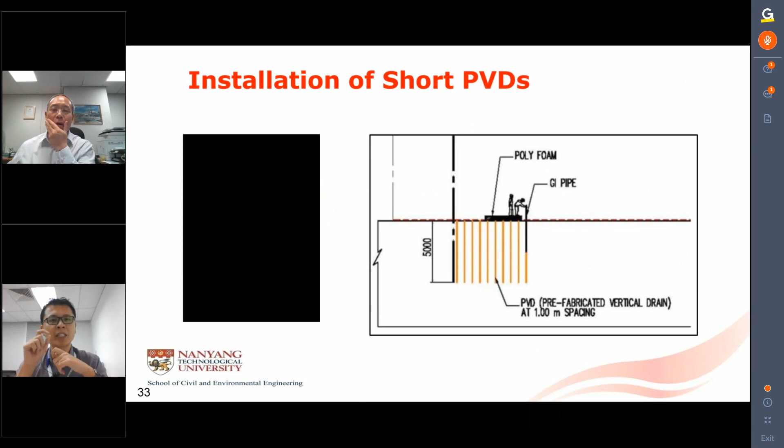I think that's one more approach you showed earlier, when you start to treat or reclaim the land. You dump the clay fill material into the soil, but before this you have already installed PVD. So the question is, how do you ensure that every time you dump the clay into the water, the thickness remains constant? I think earlier you showed the methodology of reclamation, reclaiming the ground layer by layer after installing the PVD. Right, so that refers to this method. I think there's one more slide when you click on the horizontal drain.

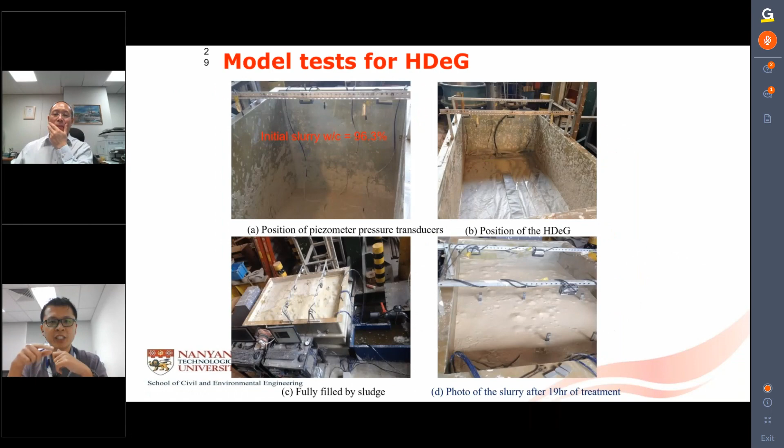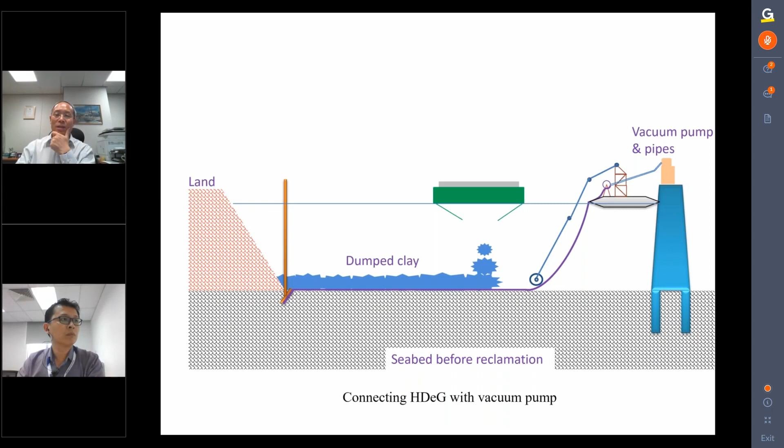Yes, this HDeG. Correct. So the question would be, how do you ensure that the dumped clay is even? As you can see, the horizontal blanket is installed from a barge, so for the other end, which has already been linked to the drainage pipe and pumps, that's not a problem.

And the second question is, when you install the second layer, how do you ensure the settlement is uniform? You don't need to ensure the settlement is uniform, because the horizontal drainage layer doesn't have to be horizontal.

Sometimes people ask me, you cover it with a layer of clay, although the layer is very soft, there's a possibility it may not be sealed 100%. So if you have leakage, what do you do? Well, even if there's no vacuum, because you are going to put fill materials on top, you are still applying surcharge. So the horizontal drain can still act as a drain, but in this case you cannot apply vacuum.

But once you put the first layer of slurry, the seal may not be 100%, but when you put the second layer, the third layer, you actually enhance the water tightness. So in this process the water tightness can be improved, and the vacuum can still be in effect. Or even if there's a certain leakage, you still can apply vacuum, it's just your vacuum efficiency is not there.

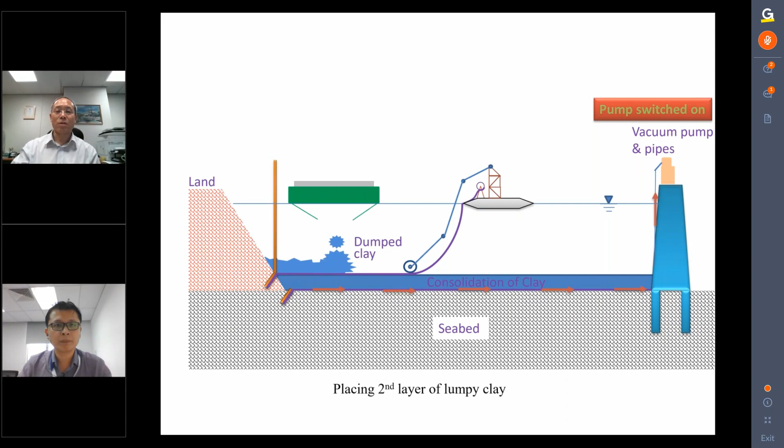Yeah, you are right. For our laboratory monitoring, of course we can put some settlement markers at different depths to monitor the different settlement. If you put them layer by layers, you can put some markers, let's say on top of the horizontal drainage blanket, before you place the other layers. Also, you can calculate your degree of consolidation using the pore pressure installed, pore pressure measured. So you can put pore pressure transducers into the clay layer to measure the pore pressure.

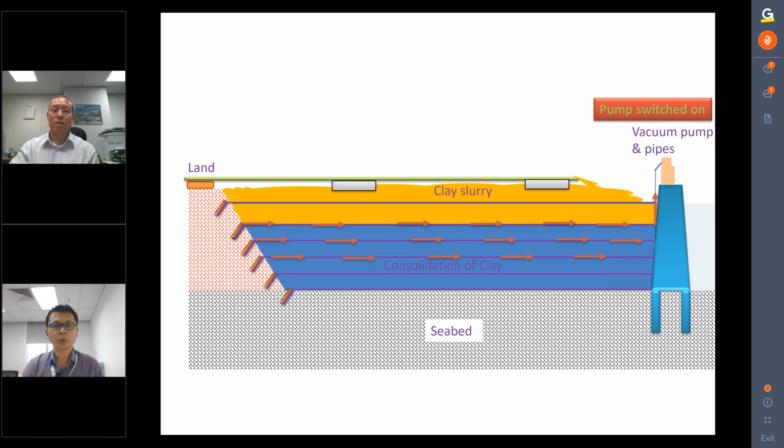So in fact, if you go to this paper, they do install methods like a settlement gauge or rod settlement gauge all the way down.

I have not really thought through how you do instrumentation for this particular method. But I thought that you can just put the settlement markers when you place your horizontal drains layer by layer.

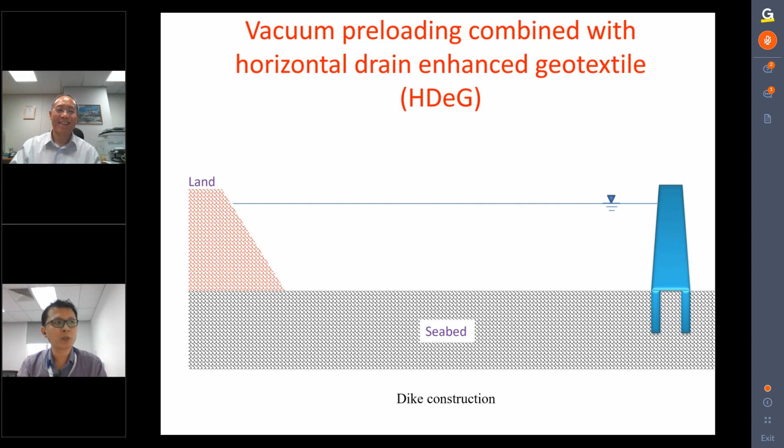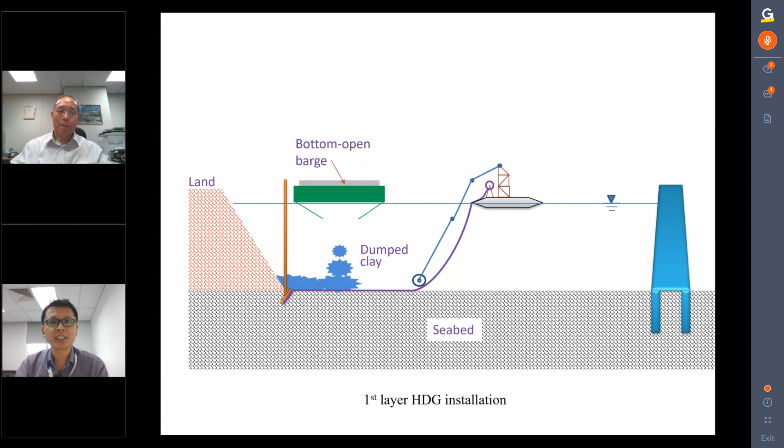This refers to the early vacuum method, right? After you've completed everything, you will be building buildings from the top. So one of the audience wanted to know if there is any problem, or resistance, due to the membrane and geogrid. I don't think so.

The reason for that is because this is a real project. PVDs have been installed subsequently, so there's no problem for you to install PVD.

Okay, so let's go to the next question. When installing PVD offshore, how is the accuracy based on your available case study? Can the specified spacing be achieved?

I believe so, although I do not have data because it didn't occur to me this can be a problem. But if you look into the barge, look into the frame, I have visited two of such machines, one in China, another in Hong Kong for the Hong Kong third runway construction. The frame is huge. I don't think the frame is going to bend like the mandrel in our normal PVD installation.

Our normal PVD installation has an inclination of a few degrees. For this barge, I don't think the inclination will be as bad as the normal PVD, simply because it is much more rigid. But even seeing that, it actually doesn't matter, so even if your PVD is not installed vertically, it doesn't affect your discharge function.